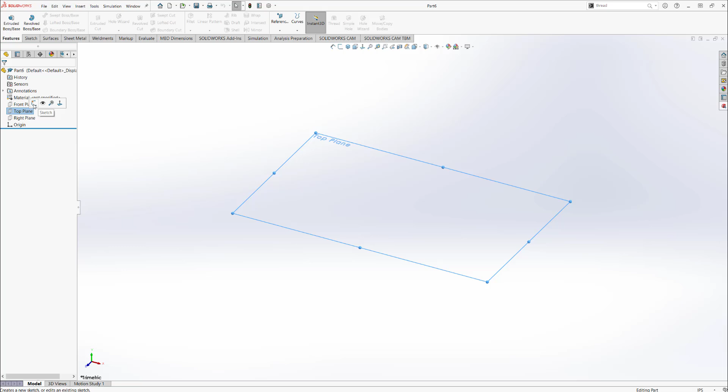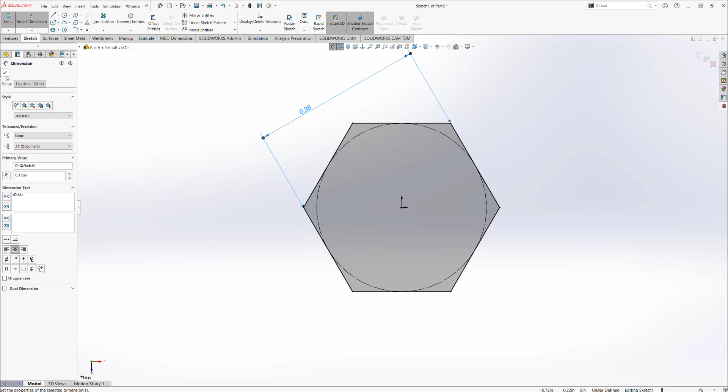So in order to do that, let's extrude a hexagonal sketch. So click on sketch, choose polygon, make your hexagon, and then let's start dimensioning it. So if you go ahead and refer to drawings online, the hex length is usually 3/8 of an inch. So once we're done that, go ahead and click OK.

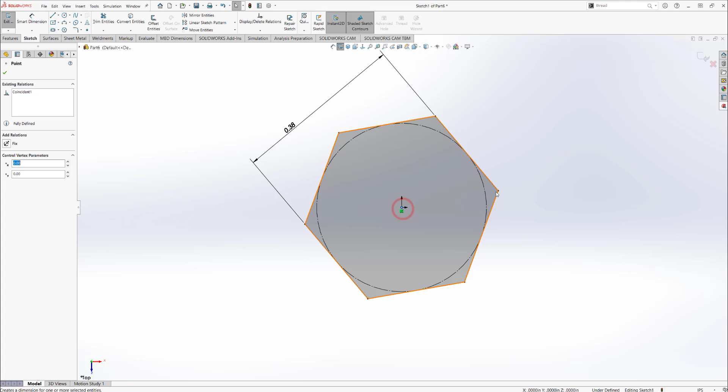And you notice that my sketch is still underdefined. The reason it's underdefined is because it's rotating like this. And it's a good engineering practice to have everything defined properly. So what I'm going to do is go ahead and make this corner and the origin horizontal in relation to each other. So that fully defines my sketch. So I can go ahead and proceed with the extrusion process.

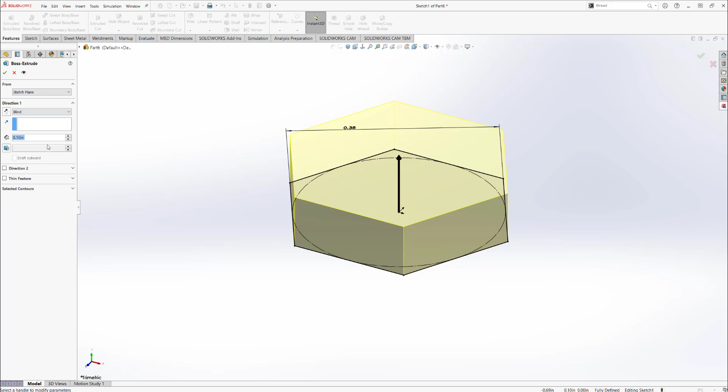Let's extrude. Let's do a mid-plane extrude so that each side is symmetric. And let's choose the coupling nut length to be 7/8 of an inch. It can be whatever arbitrary dimension you like. So once we're done with that, go ahead and click OK. Now you can see that our coupling nut is starting to come together. Now all we need is a 1/4-20 hole in the middle. So let's go ahead and do that.

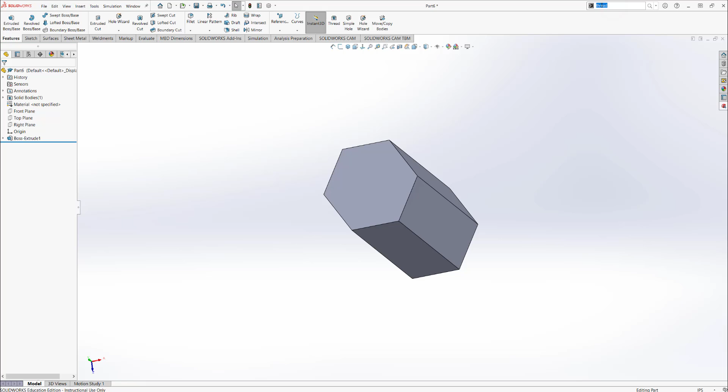So we're going to make a hole using the hole wizard. If you can't find this, all you have to do is go to the search bar, choose commands, and then choose hole wizard. And it will be the first option that pops up. So go ahead and click on that, and then you can select the type of hole you want to make. So for the standard, I'm going to choose ANSI inch, and for the hole type, let's just choose hole, right? This guy.

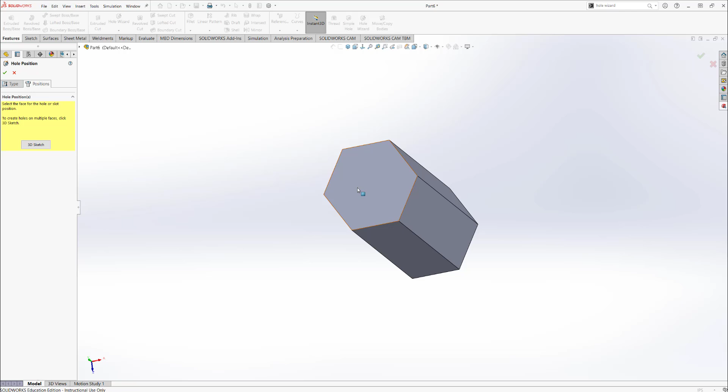And for the type, I'm going to use a tap drill because I'll be tapping after I drill the hole. And for the size, I'm going to choose 1/4-20. And the end condition is going to be through all. So the hole that I make, which is by selecting positions right here, it'll ask you to choose a face. I'm going to choose this face, and the origin is going to be my center point.

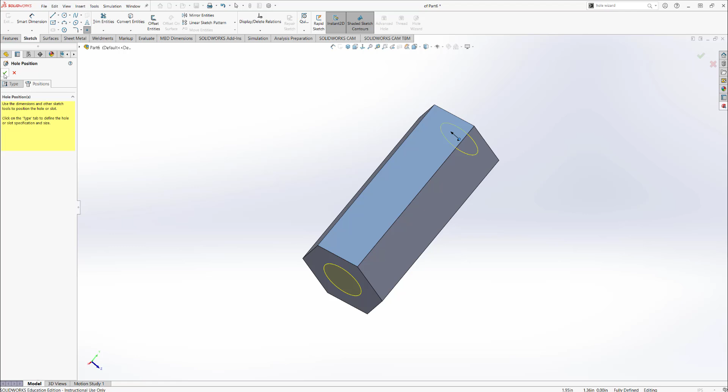So once I do that, you can see that I get a small preview of what my hole is going to look like, and it's going to be through all. And once I'm done with that, I click OK, and you can see that my hole has been made. Now after that, I need to make threads in here. So in order to do that, Solidworks has the thread feature. And if you can't find it again, just go to the search bar, search for thread, and the first one that pops up is what you need.

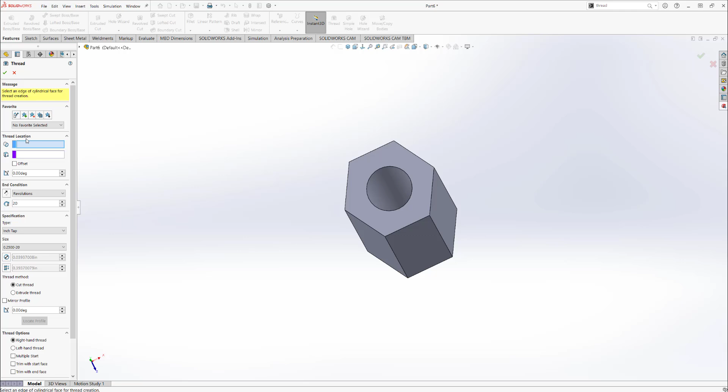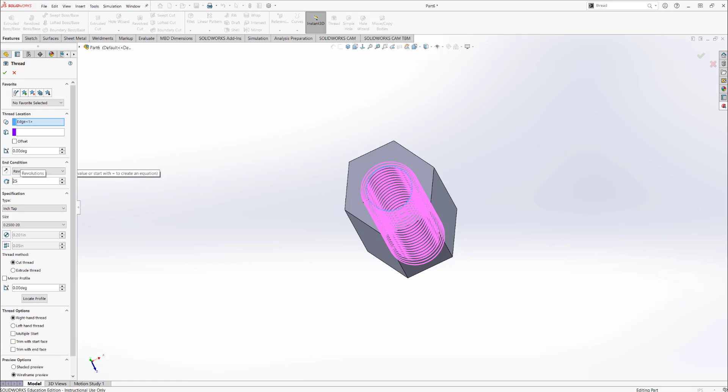Over here you can see that Solidworks requires you to have a thread location. Now since we made that hole before, we're going to choose that as our location. And it will ask you for an end condition, which is revolutions or up to selection. I usually like to choose revolutions. Let's make this 25 revs, and you can see that in the thread preview, the threads are poking out the hexagonal part, which is not a big deal.

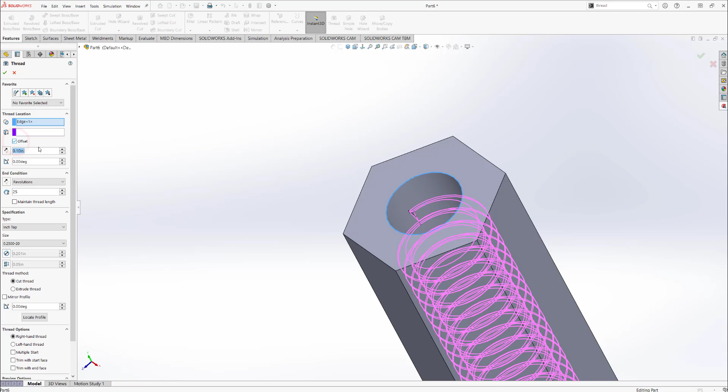But at the top, you can see that my threads don't start at the beginning of this circle. So what I'm going to do for that is choose the offset option and click reverse direction and make sure that my threads start way above the part. And over here I'm choosing it to start 0.1 inches above the top of my selected contour shown in blue here. So that way you have clean looking threads.

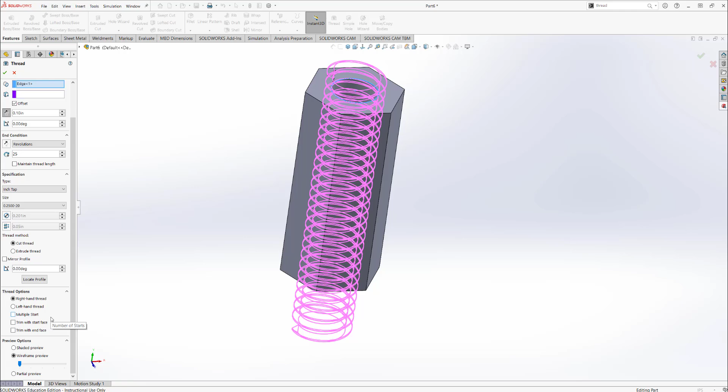Now for the specs of the threads, I'm going to choose an inch tap. If you were making external threads, you would choose inch die. And for the size, it's going to be a 1/4 just according to the hole that you made before. The thread method is going to be cut threads because you're going to cut a portion of the hexagonal stock part that you just made. And it's going to be a right-handed thread. The rest of the options can be left to the default settings. So go ahead and click OK, and you can see that your threads have been made.

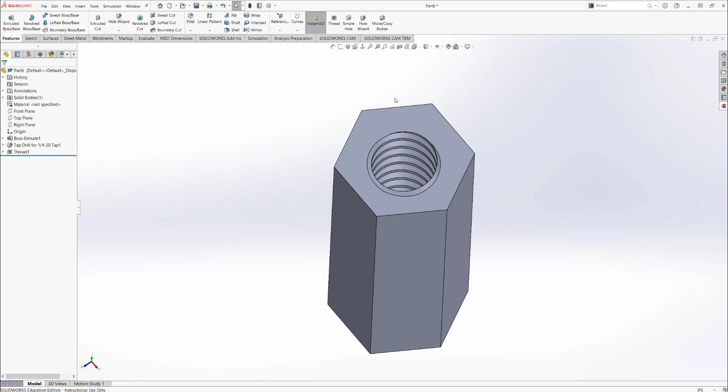Now if you look at the front section view, you can see that my threads look perfect here. Let's go ahead and exit the section view. Now the only problem we have is usually your coupling nuts have some sort of chamfer around the edge. So let's go ahead and make that. I'm going to choose the top face, make a sketch on it, make a circle. Make sure the radius of the circle coincides with the inscribed circle hexagon diameter. Click OK.

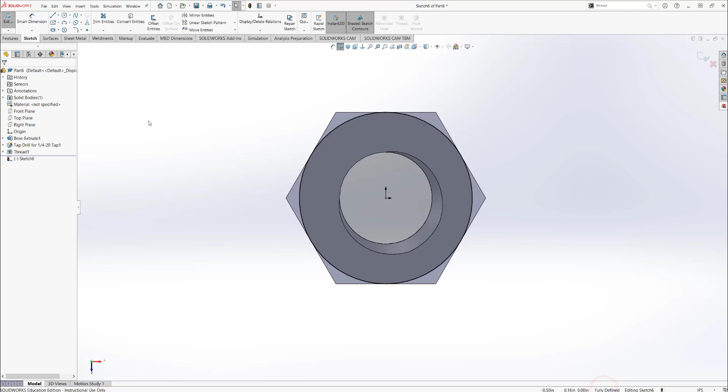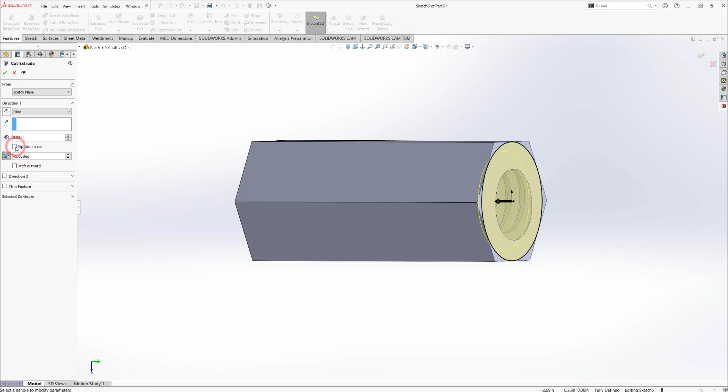Once you have that, let's try and fully define the sketch. Select this point right here and the circle, make it coincident, and you can see that my sketch is fully defined now. So once you have your circle, we're going to choose extrude cut, and we're going to choose blind, and the depth of cut is going to be 0.03. It's just a number that I chose. You can make it whatever you want it to be. And we're going to draft our cut outwards 45 degrees. Let's flip side of cut so that we cut the edges. And you can see the preview. It's starting to look like what we want it to be. So go ahead and click OK. And your first side is done.

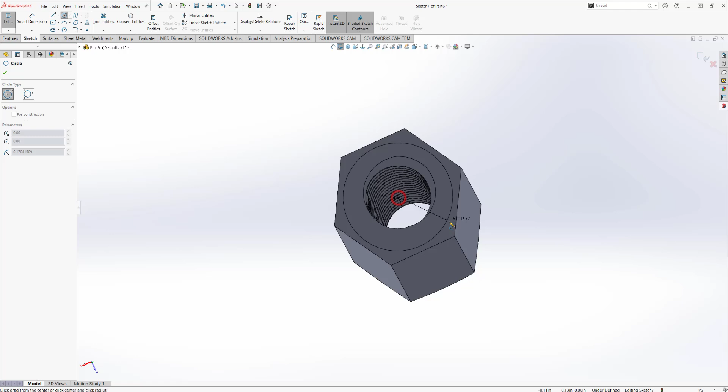Repeat the process on the other side. Quickly go ahead and draw a circle. Click on features, click extrude cut, click blind, flip side to cut, and draft outwards, click OK. Solidworks usually saves settings from the previous cut that I made, so that's why I was pretty quick over here. So there you have it, that's your coupling nut.